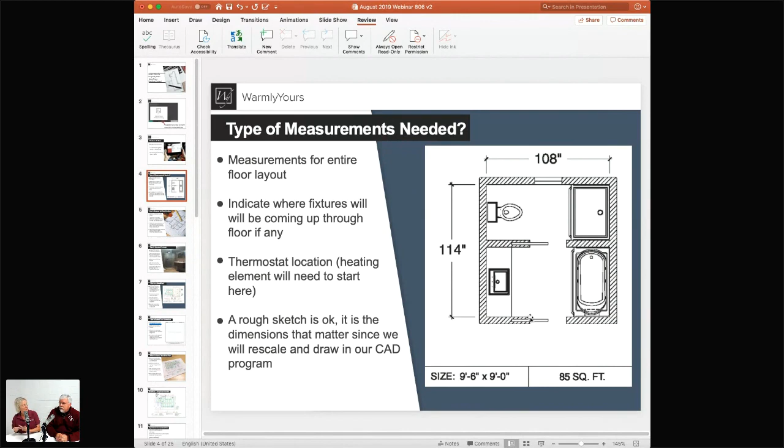Now let's move on to our second slide. Let's talk about how you're going to be doing these measurements, and what are a little bit more detailed items we want to think about.

You always want to remember that you never heat under something that's a permanent fixture. So if you have a box bottom cabinet, you don't want to heat under that because it's going to trap the heat, and that's against the National Electric Code. So ideally not under a vanity, unless it's the toe kick.

We've got a good slide that talks about that, a hanging vanity as well. If you have a suspended vanity that hangs from the wall, then you can heat under it. You just don't want anything attached under something that's permanently installed.

A tub, unless it's like a clawfoot freestanding tub. The only thing you have to worry about then is where the plumbing comes up through the floor, and if they're going to drill in holes to hold the thing down.

So the most important thing is to get us dimensions that are close. The better dimensions you get now means less revisions later. I've done a bunch of these floors, and the least glamorous part of putting this floor in is getting the initial dimensions. That's the part where it looks okay, looks okay, and then you come back with a plan and go, oh, that's not okay. So you really need to make sure you get those dimensions at some point.

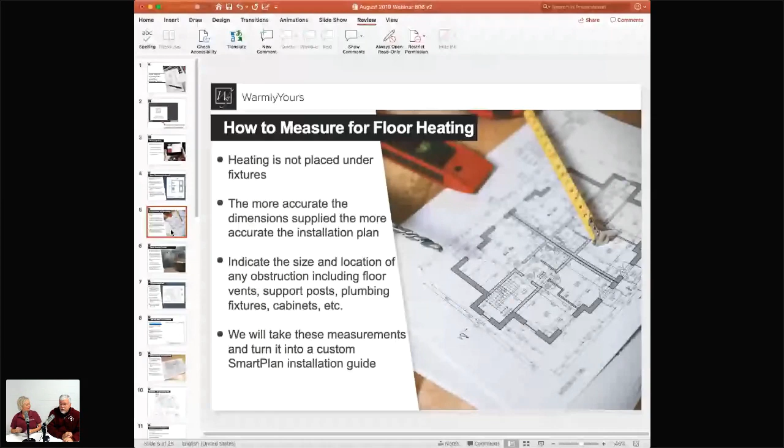Special areas to consider - we talked already about a wax ring. We design the room and always assume where the wax ring is. We have the dimensions for the area and ideally the dimensions for the toilet, baked into the calculations and formulas we've been using for the last 20 years.

We pull the floor heating away from that wax ring. If we do the plan for you, you're guaranteed we're not going any closer than 4 inches away.

I love this picture because it shows a shower. In the old days we didn't really heat showers, but now we do because people love to have the floor nice and warm. As you're walking the room, think about whether you want that floor heating when you step out of the shower, but also whether you need it when you're in the shower.

Another thing I love about this picture is that we are approved for wet locations. Always look for that.

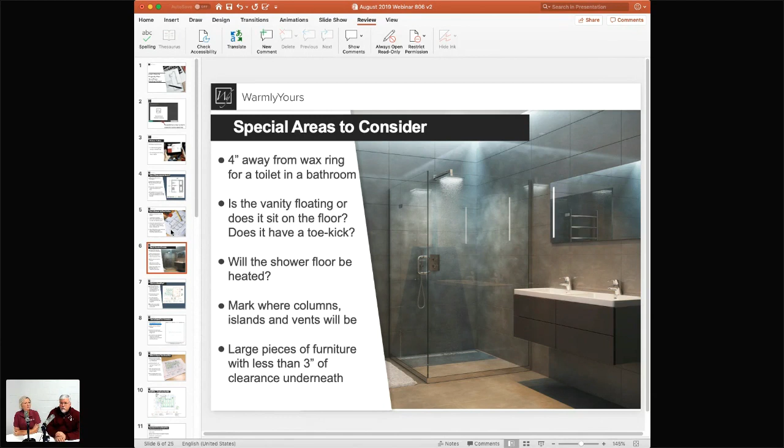That's all the special stuff I can think of. So let's move on to measuring. We want you to take all those measurements, consider everything, and then you'll get something back from us called a SmartPlan. The better information you give us, the smarter this plan will be.

There are varying degrees of difficulty when it comes to doing an installation. If you have a great big square with unheated area around the edges, you have a lot of leeway - you can move it where you need and pull it away from spots you don't. But these measurements here are very critical, because if this distance is really only 3 feet instead of 3 feet 3, that affects every single bit of the design.

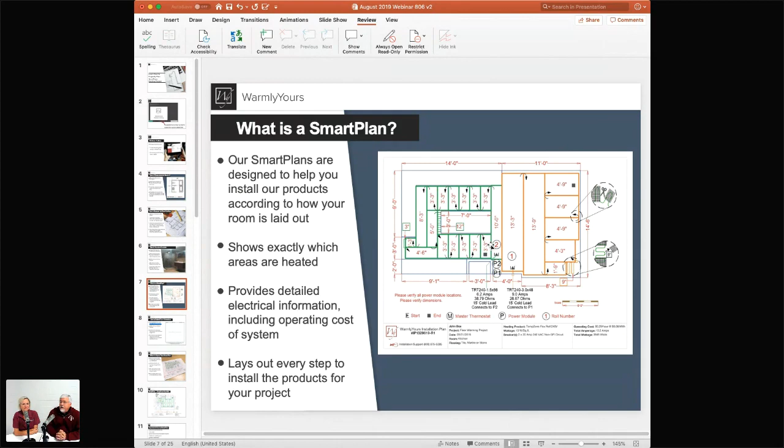So let's take a look at how to get to that plan. How do they get the plan? Very simple - because they took the measurements, they have to send it to us, and there are quite a few ways you can send it.

Carrier pigeon - that's one way. A Game of Thrones would be that, I think, right? Yeah.

There are many ways for you to submit a plan. You can draw it on a piece of paper, take a photo of it, and send it to sales@WarmlyYours. We also have online tools, like a quote builder, where you can just put in some simple overall dimensions.

We actually got a question like that before the webinar. Jessica M asked, how do I just get a simple quote, just a ballpark figure? You can go on our online quote builder tool, and that's exactly what it does.

Then we have something called a design tool, where you can really get into the nitty gritty, down to quarter-inch detail of the room dimensions, if not even greater. If you want to learn how to do that, we have daily webinars that we do every single day here at WarmlyYours.

One of them deals with how to get a floor quote using the builder. So the quote builder is really great. If you're interested in learning how to use it better, check out one of our daily training sessions. One of the upcoming topics—you can check our website, and we'll tell you when that's going to be addressed. So just join us for that and we can go over it.

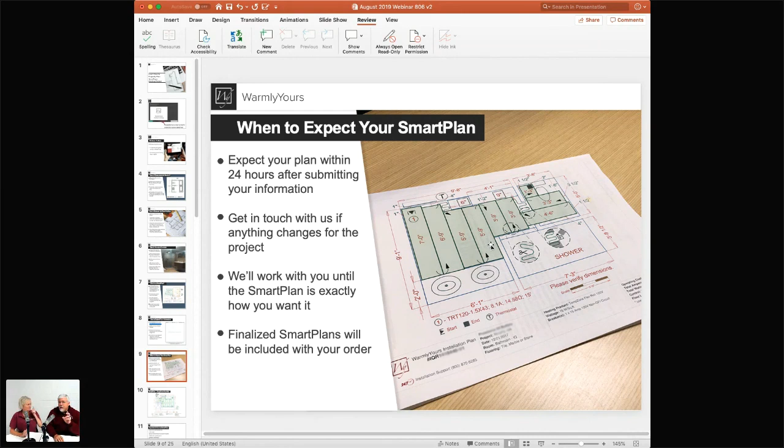So now that we've told you when to look for your smart plan, we can now take a quick look at the guts of it. All right, give me the guided tour. So first of all, you told us where the thermostat is, right?

So when you told us where the thermostat is, a T in a circle, that's where the beginning of the mat is. The beginning of the roll is a triangle and the end is a square. So you can see we're not starting the product over here and running it back and forth—we're starting it right here by the thermostat.

That's what you were talking about earlier, that 15-foot return power lead. We're going to do that work for you. You don't have to worry about where it's going to begin and end. That's the reason why you want us to do the smart plan.

Yeah, and then you can say, hey, the homeowner decided to change the location over here. So all you have to do is let us know, and they haven't changed the floor size. The size is still the same. We're just going to take that same roll and reconfigure it to start over here in this corner, if that's where the thermostat's moved to. Now this roll has a beginning and an end.

Talk me through what's happening in the middle. Well, you can see the amount of distance we have here. This is a roll that you roll out 3 feet, you cut the mesh, and then you start following these instructions. This is like a pattern. Yes, so you lay this pattern out on the floor.

When I go out to do an installation, what I start to do is get my tape measure and my black magic marker, and I start measuring 1.5 feet, 1.5 feet, 1.5 feet, 1.5 feet, and 1.5 feet. Now you're saying 1.5 feet because the strips are 1.5 feet wide. Correct, but the strip, for example, starts at 7 feet and then gets smaller. What I'm doing is going across the room this way to make sure all these runs are going to fit.

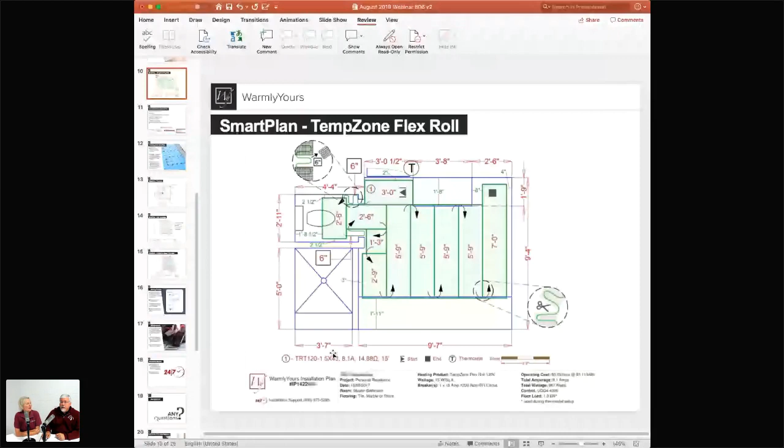Before we lose that - not only the SKU here, but it tells you the amperage, 8.1, and it tells you what the ohms are. That's important info on a smart plan. That was a great transition - almost like we planned to put this in here.

But if you look at the bottom of the smart plan, that's where you start getting into the nitty gritty. It tells you what the floor load is going to be, it asks you once again to verify your dimensions, tells you the operating cost estimate, reviews the total wattage of that floor installation, the total amperage, and it also tells you the voltage, to make sure the thermostat you buy doesn't change 120 volts into 240, or 240 into 120.

That would be beautiful, it would be awesome, but what it does is simply a switch - whatever voltage is sent to it, it sends through. So it's very important that the power you supply to the thermostat matches the power required by the actual floor heating product. We do put a lot of this information right there on the smart plan for you.

Also along with that is a detailed electrical breakout for your electrician. So you've got two trades involved - the person installing the floor, and the person responsible for making sure there's enough power. Maybe that same person is also wiring the thermostat, so they need certain information, while the flooring people need other information. Most of this, though, is related to electrical. So let's walk down - we have that large box right there on the right, which gives a ton of information.

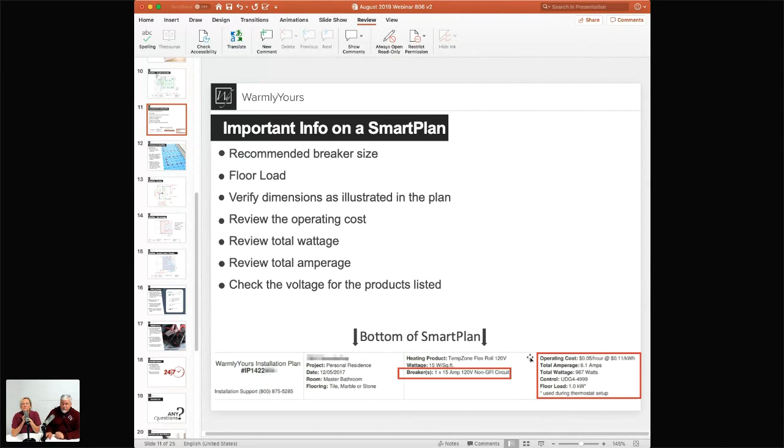Now, this is something that's rather recent within the last 5 years, in that there are installation underlayments that can be used to install the floor heating systems. We've talked about a roll system - they don't need an underlayment, they're just rolled out, and the fiberglass mesh is cut according to plan. But also becoming even more popular are cable products, cable floor heating.

With cable, there's a couple of ways you can install them. You can install them with fixing strips, and just string it along the room. Some people even just use tape to fix them in place. But what's becoming very popular are underlayments like Prodeso, the first underlayment on the market. We offer a Prodeso uncoupling membrane that you can use to string the heating element along in the membrane, and it goes faster that way. What you see here, the blue, with the little hockey pucks, studs that stick up, creates a channel for you to quickly move the cable into those channels and across the room.

So this underlayment is installed a little bit differently than the cable. Yeah, you need to make sure that it's thin-set down to the subfloor. So you're actually going to get the subfloor ready, thin set the subfloor, push this product down into it, and use either a roller or a flat trowel to push it down in there. You're going to pull it up to make sure you have good adhesion. If you do, then you just keep putting it inside the room. And then once you do that, you can lay the cable in, and then you're ready to tile.

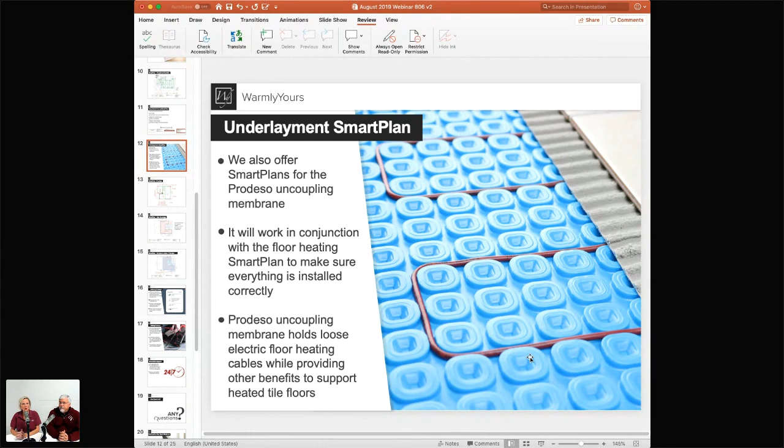All right, so we're going to talk about the underlayment because it's a little bit of a different plan. Remember earlier we were talking about walking the room, because you really only want the heating element where you're going to feel the warmth. Prodeso's different. Yes, and this one is another floor that I installed, and this was the one where we had a curbless shower. So we had no curb here, so we had two rolls of Prodeso, and it shows us what section each size we need to cut to make it fit. So these were taken out of roll 1, and then roll 2 was one large piece inside the shower.

So wherever you have seams, you're going to address that a little bit later, but what you do is attach the cable and run it through this space, then out into the room, and you can do however you want to do it. Once you get the cable laid out, then you put the waterproofing seams over it to make sure at that point you have a waterproof bathroom. These seams have been covered with a cable and then covered with a waterproofing band. The edges have been waterproofed.

So literally all the water that's generated in that room—a perfect example is if the shower drain gets clogged, where does that water go? Normally it would go out into the bathroom floor, then down into your living room. Not a good scene. So it just keeps it all here—it's like a giant bowl that the water can sit in. You go, oh my gosh, this thing is overflowing. Yeah, get that thing cleared out, and then all that water can go back down the drain.

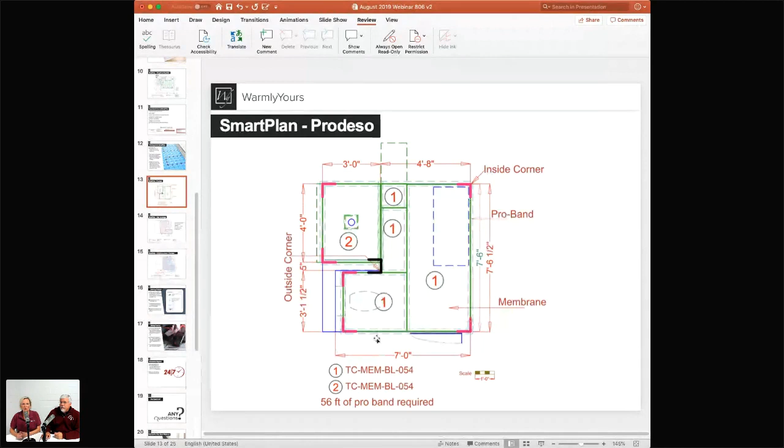And the key here is we'll give you a plan for how to install the Prodeso. If you're using an installation membrane, Prodeso or any other, we will give you an actual plan for how to install it. So it's important to check that plan as well, because the Prodeso will go under the entire space. We'll also show you where the inside corners get put and where the Pro Band goes, so you can do the appropriate waterproofing. Right. Brilliant. I like that.

And then from there, we will show—a lot of people don't understand what areas get heated. So we like to show big picture: this is going to be your heated area. Very simple. But from there, you need to get into the nitty gritty details of how you're going to install the cable. At first, this is an excellent tool to use with your customer or homeowner to say, is this it—and here it's pretty clear, I don't think there's anything else they could have done but the shower. Is this the entire area? Is this covering everything you want? Right, okay, so this is, again, big picture.

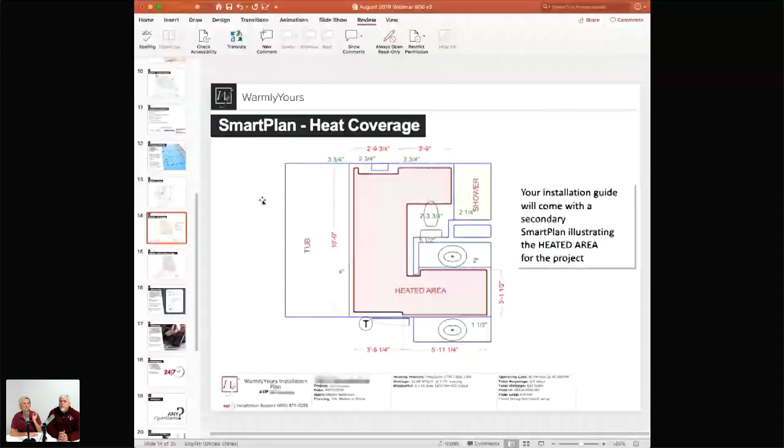And then what we do from there is you really need to know how to install it. So before, we showed you the flex roll—you rolled that out and made cuts to the fiberglass mesh every so often, right?

Here it's a little bit different. What it does is it actually shows you how far from the wall to make sure each loop stops. It's going to tell you how far from the wall the last cable is going to run against the tub. That's very detailed, and it tells you where the triangle is the start.

And that's coincidentally right by the thermostat. So it tells you here you're going to run it back and forth, and then all of a sudden there's a red dot. That red dot matches a white piece of tape on your heating cable, and that mark is the halfway point of the cable. So when you're doing your installation, you can say, I'm doing this right because my white mark is right around this spot. If your white mark is over here, you might be in trouble.

Because you put this too close together. If your white mark is way over here, it means the cables have been spaced too far apart. So this way you can figure out if you're doing well or using too much or too little. You don't find that out at the very end, you find out halfway through, so you don't have to go back.

It's much easier to do half the room and pull it back up and start over than it is to get to the very end and realize you've got 16 feet of cable left over. That's because the red dot was over here. So that's a great checkpoint.

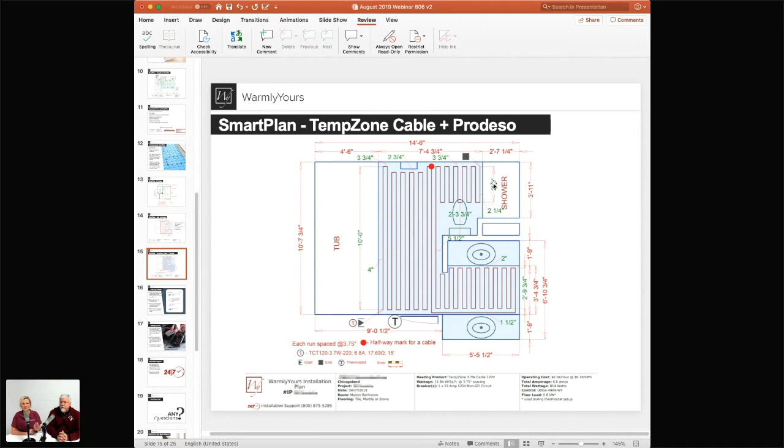If you get too far away from the wall, you're going to have too much cable at the end. So these plans are important for that reason, especially with cable.

What else do you want to talk about? Well, now we want to talk about... do we have any questions? We have some at the end. I don't think I see any up here yet.

All right, but we're getting to the fun part. The fun part is the ordering part. We've done all this tedium, measuring and looking and measuring and all that stuff. Now we get to get the cart full because we're going to order the correct size, the right amount of things. Here's our heating product.

Here's the thermostat, here's the circuit check. The circuit check is the piece that you attach to the cable, and as you're working over the cable, it will alert you if you damage the wire. It's a good thing, so it's very important.

Besides the circuit check, you have the floor sensor, and the floor sensor is always in the thermostat box. The nSpire Touch also has included in the box the actual thermostat that goes on the wall, and a sensor that's embedded in the floor with the heating element, never touching the heating wire.

So a little tip there: you want to make sure that sensor is put into the floor about 6 inches into where the heating element is living, close to the thermostat, and that it's never touching a heating element, because then your thermostat readings are going to be way off.

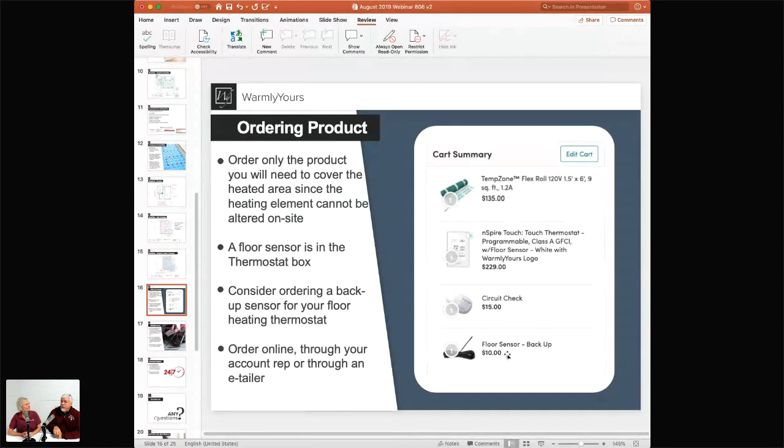A lot of people like to order a floor sensor as a backup in case the first one fails—it's rare, maybe 1 in 10,000, very low failure rate, but if $10 is worth it for peace of mind, you simply install the backup floor sensor in the next open loop and run it up to the back of the thermostat. You don't attach the second one to the thermostat, only one. This is the fruit of all the planning you did with measurements and reviewing the smart plan, so now you know you're getting the right thing.

And on your rolls, if you get a heating roll, there are three of these stickers—exactly the same thing—one at the end of the roll, one at the beginning, and one on the cold lead. We really want you to make sure the product you get is exactly what you ordered.

The last thing you ever want to do is install something that got damaged between us and you. So that's why it's so important to test it first, because you don't want to put in something that's not working right.

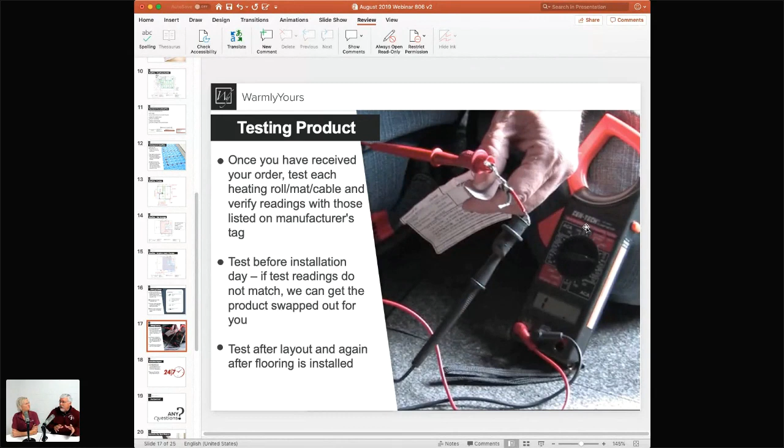All right, I like that. Lots of good information, Scott. Yeah, just wait till these other ones—we're all full of it. Literally. Yeah, well, yeah. All right.

We talked about testing. If there is ever a problem, Warmly Yours is an industry leader. We were the first in the industry to bring on 24/7 tech support. Scotty's very familiar with that—he manages that team. Do you want to talk about why that's so important?

Well, I was taking a shower this morning when my phone rang, so I wasn't able to get it, but somebody else on our team was.

Nice. So yeah, if you have a question, it's better to ask it, especially for installation. Hey, this is what I have, should I have this, should I have that? If you give us the installation plan, we can say, hey, what's the ohm supposed to be? What are you getting? That's good or bad—that's the key.

Like you're testing and you're looking at your ohm reading, and then you look at the sticker and you're like, oh, this is off by X percentage. You might want to call in, if it's after hours, to our 24/7 tech line to make sure—no, that's fine, it's within tolerance, or, hey, we might have a problem there. Let's get that quickly replaced for you.

So 24/7, the reason for that is evenings and weekends, people are doing projects without a doubt, and we want to be there to support you for those.

Bottom line. So you guys think about questions. While they're thinking, I want you to start thinking about some of the questions we got in advance. Man, you want me to think? I do. All I know, trouble now.